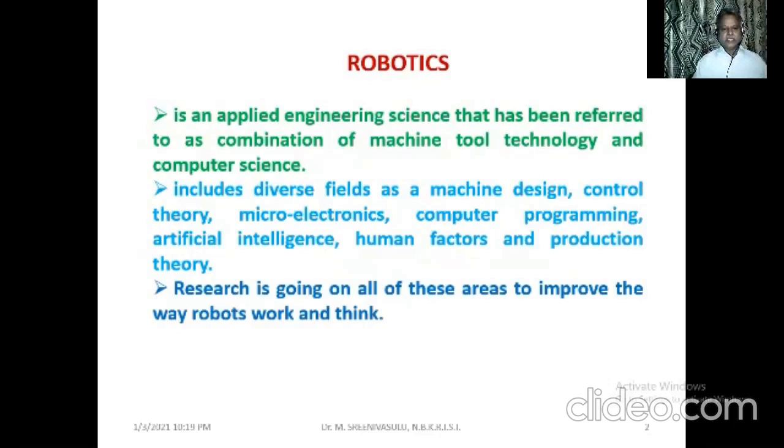Research is still going on in all these areas to improve how robots work and think. We were assuming that all instructions given to the robot were for acting on a particular situation, but nowadays instructions are given in such a way that the robot can think and act. That is what is actually happening in artificial intelligence.

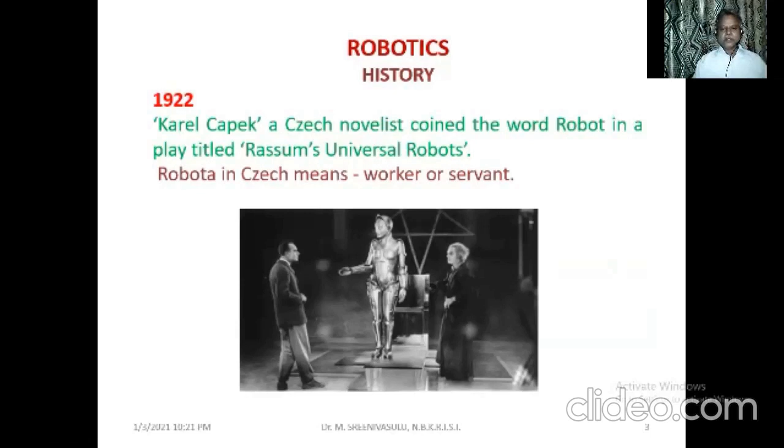Let us see what has happened. In 1922, Karel Čapek, a Czech novelist, coined the word 'robot' in a play titled Rossum's Universal Robots. In that play he started using the word robot. What does it mean? 'Robota' in Czech means a worker or a servant. That is proof for Karel Čapek's usage of the word robot in his play.

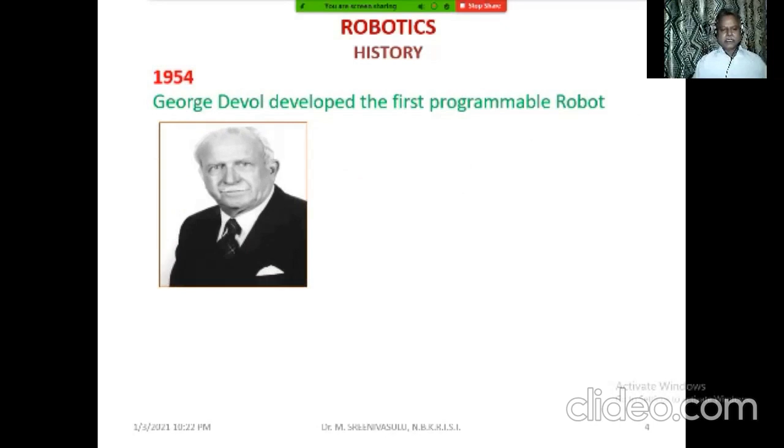Next, in 1954, George Devol developed the first programmable robot. He is the man we have to be grateful to. Though he developed the robot in 1954, he continued his invention, and it was actually patented in the year 2011. He was with us from 1912 to 2011, so in the last days of his life he went for the patent and applied for it.

He realized the importance of factory automation in the year 1930 itself. Then he filed a patent on a 6 degrees of freedom robotic arm that stored step-by-step commands. This happened in 1954 itself, and this has laid the foundation for the modern robotic industry.

Whatever he patented in 1954, that number might not be available with us, but whatever developments he made up till 2011, whatever he applied for patent, that information is readily available.

He founded Unimation Inc. Corporation, the first robotic company, along with Joseph Engelberger. This happened in the year 1956. The first unit was installed in a General Motors plant in 1961. Many more laurels are there in his credit.

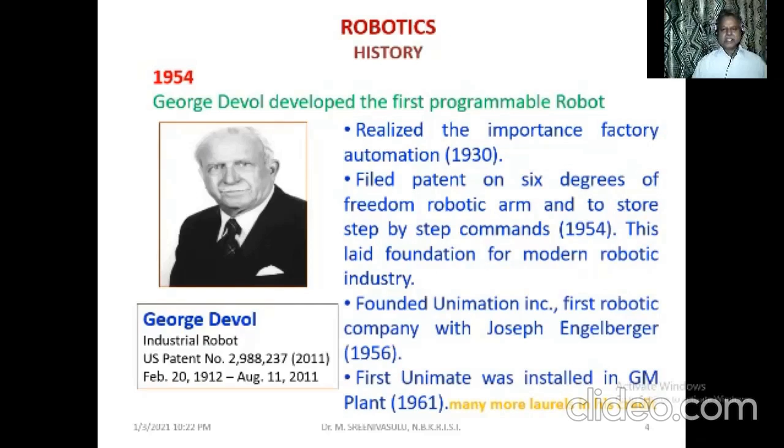Then in 1954, Denavit and Hartenberg developed the homogeneous transformation matrices. A pictorial representation shows the various parameters at various joints - joint 1, joint 2, joint 3, joint 4, and link 1, link 2, link 3 - with the angles associated with them. Link-wise joint angles as well as their lengths have been tabulated. This information he was able to generate in 1954 itself.

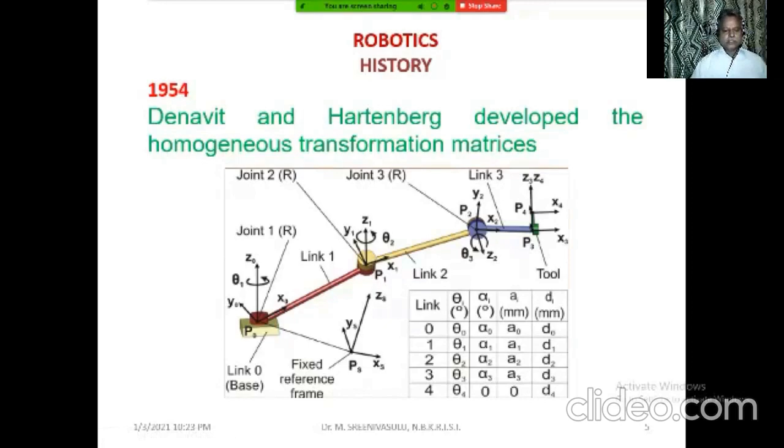He made it available for us, and even today we are able to use that information and understand more than 3 degrees of freedom. Without the DH representation, it would not be possible for us to analyze that.

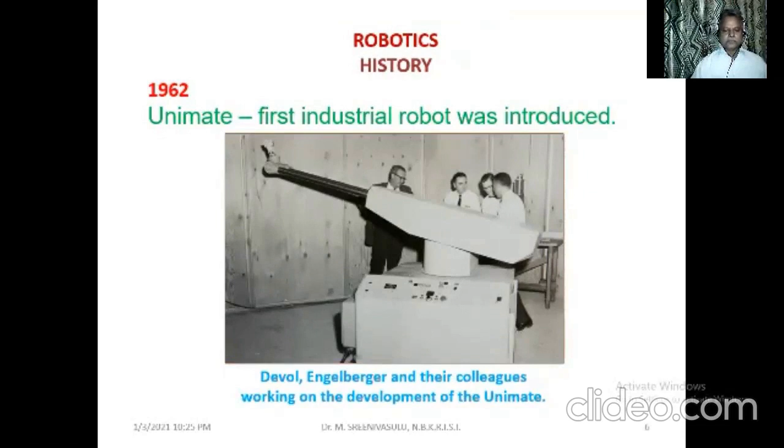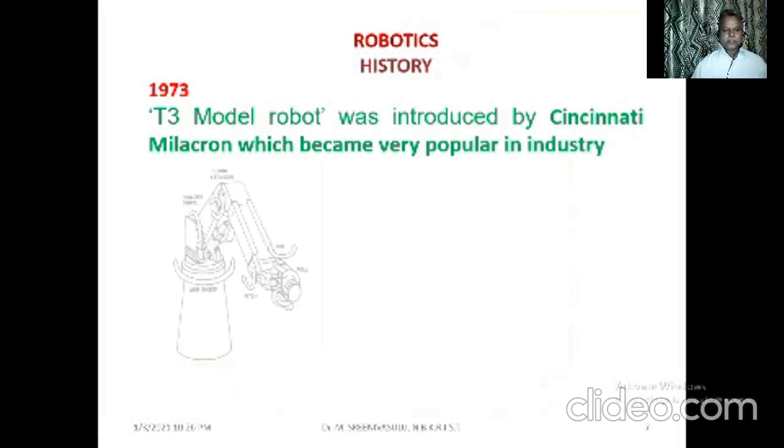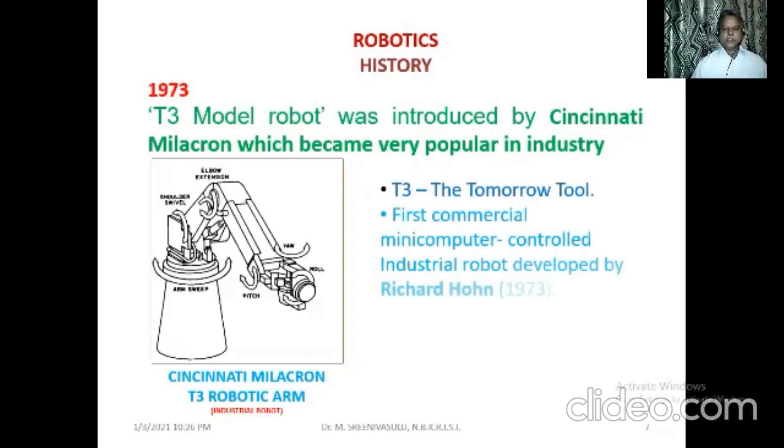Then in 1973, the T3 model robot was introduced by Cincinnati Milacron, which became very popular in industry. This is a line diagram showing detailed information, with 6 degrees of freedom. T3 stands for 'The Tomorrow Tool' - it was the first commercial mini-computer controlled industrial robot, developed by Richard Hohn in the year 1973.

You are supposed to feel proud of it. Unless these inventions had taken place, today we would not have been in a position to use robots so extensively, in a manner we cannot even assume. It is actually a 6-axis servo control articulated arm manipulator, powered by hydraulic actuators.

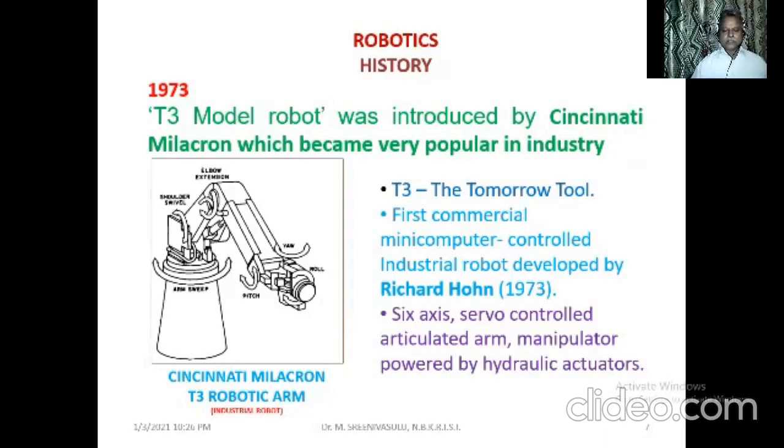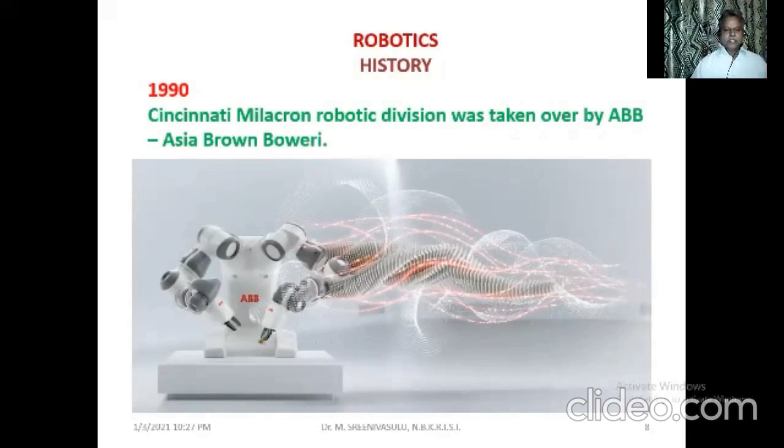In 1990, the Cincinnati Milacron Robotic Division was taken over by ABB, Asea Brown Boveri. Now we are seeing so many developments under this company. ABB provides a comprehensive range of robots to help manufacturers improve their productivity, product quality, and worker safety. ABB has installed more than 4 lakh robots worldwide and pioneered in automating industrial robots. One such robot is with our department - we have to be proud of it, as one robot manufactured by ABB is actually with us.

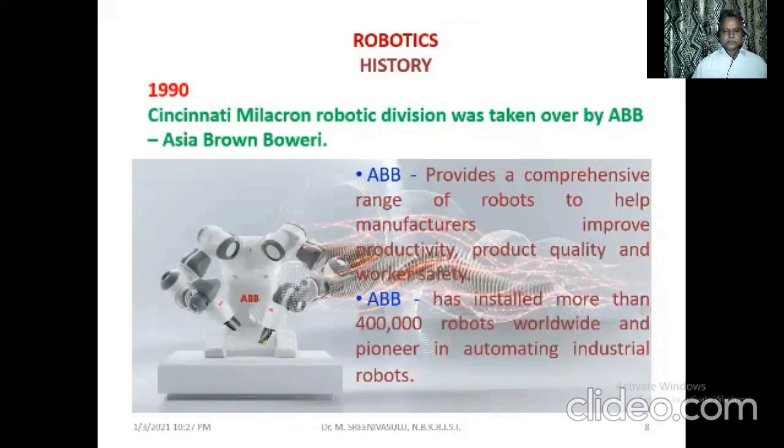With this, I would like to conclude the introduction to history. This was trying to give a glimpse of history - I have not dealt with detailed history, but only the major turning points associated with it. By now you would have realized the importance of Cincinnati Milacron, ABB, and the Denavit-Hartenberg representation, and how the name 'robot' actually came about.